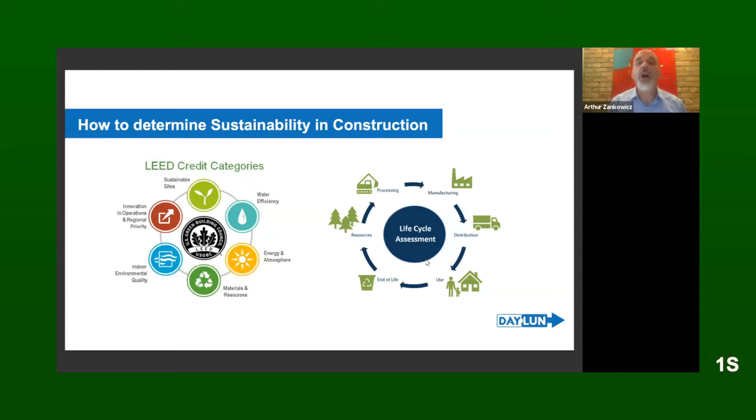One of the things my company likes to do, and it isn't really being talked about so much yet, is deconstruction. We have what's called infills, where houses built in the 50s and 40s are being redeveloped, and essentially you'd have an excavator come by and crush it. Well, it's important that we learn how to reuse and take some of the product in these houses and recycle or upcycle.

Right now, 23% of landfills come from construction waste. That's a pretty big number. A quarter of the garbage in your local landfill is from construction. So what can we do? We can deconstruct properly.

We can regulate citywide to say that out of a certain percentage of the house you knock down, a portion has to be used or reused. We can use product that is organic and biodegradable, meaning we can take it, put it in the ground, and it goes back into the earth. It has a life cycle that way. We can make product that you can reuse and reuse.

With my company DAYLUN, we have product that you can unscrew and screw back together, which is the ultimate in deconstruction, because you can take down a house and move it somewhere else. So it's never wasted. We have what's called here in Ontario, Habitat for Humanity.

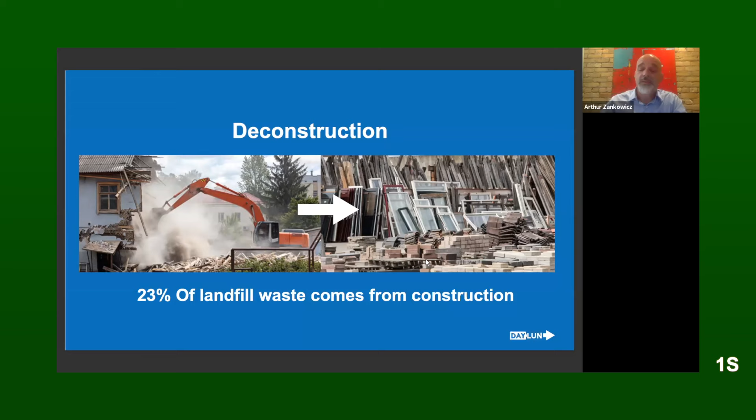Some design and construction is turning into fast fashion, where I need a new door or I want a new look. That needs to be addressed and somehow filled. With Habitat for Humanity, they take in all those windows and doors and cladding that they can put towards housing and affordable housing. So that's a big thing we need to address in the deconstruction of the way we rebuild our houses. The next thing, the most important aspect, is how we build.

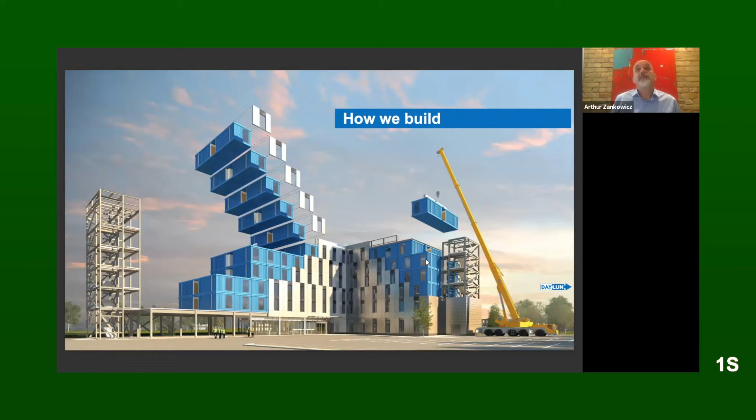The one thing about the construction business is that we've been building the same way for many, many years, and it's not efficient, it's not sustainable, and it's not cost effective. And with our housing crisis and prices going up, there has to be a better way.

The one way that we use, and it's the biggest trend, is modular build. Building off-site is turning into a big industry. It's going to be a $107 billion industry by 2026. We build cars in factories. There's no reason we can't build houses in factories.

It leads to precision, less waste if you predetermine the size of things, and you can have things pre-cut, so there's less waste, which is a great sustainable factor. A controlled environment here in Canada - when it's snowing or raining, guys just want to get home, right? And so things aren't done well. A lot of waste of materials, and things take longer.

In a factory, the factory that we designed, we can pump out a 2,000 square foot paneled house in about 10 minutes. A lot of people are shocked at that timing. But if you think cars come off the line every 30 seconds - and how complicated are cars? Cars are very complicated, right? So there's no reason why we can't be doing this.

And if we're doing this, the prices decrease and housing becomes affordable, right? So that is one big way the future of building is going to take place, and it's the modular offsite build.

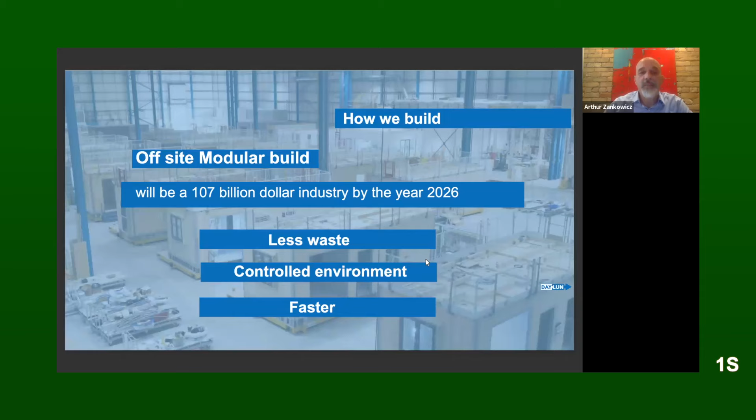The other thing that's come out in the market - it's still a new kind of process, it's expensive, but like anything in any technology, it's going to get cheaper and faster - is 3D printing. So 3D printing is essentially like your printer at home, and it has a design and it spits out a concrete compound, and it outlines the house and builds it in a 3D way, which looks like lines and layers. And this, I think, is going to be the future.

Right now in 3D desktop printing, there are filaments that are wood. So in my fashion days, we'd be designing shoes, and we'd be going through molds, trying to get the right shape, the right design, how it works together. Each mold would be like $2,000. So before we got a shoe to market, we'd spend $20,000, especially when doing a high-tech shoe, in developing and designing and making molds, and it would take so much time getting it the way we wanted. But now with 3D desktop printing, there's EVA molds.

It's the foam that's in your running shoe. There's TPU, there's different filaments that go into a 3D desktop printer that can reproduce the shoe probably almost 80% of what it is. So essentially we hit print, come back the next day, we have our shoe. So I think 3D printing is going to be a wave of the future.

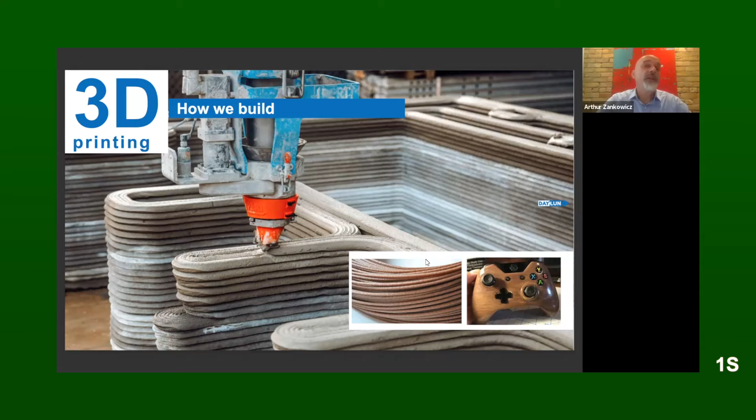And each printer head can have different material, whether it be for your kitchen, for your washroom, for your exterior, for your insulation. So I think 3D printing is something to look at and see how it grows in the next few years.

This is something that I also experiment with. Here you have Tupperware. You might think, well, what does Tupperware have to do with housing? Well, Tupperware is done with thermal molds. And thermal molds essentially is, you've got a sheet of plastic, it heats up, and out pops the shape of your Tupperware or whatever, and then you have the shape of your product.

So essentially, that makes your shape and what you want. So into the housing market, we can make molds of houses or walls according to what you need. Ideally, you have the shape of your house, you push it through a thermal mold, and then your building envelope becomes completely enclosed. Anybody who knows anything about passive houses knows the building envelope is the most important thing to your house. And if you can have one solid shape, then you've answered all the questions as far as a passive house. So I think thermal molding has a place in the future of housing, and I think it will drive innovation in the next few years.

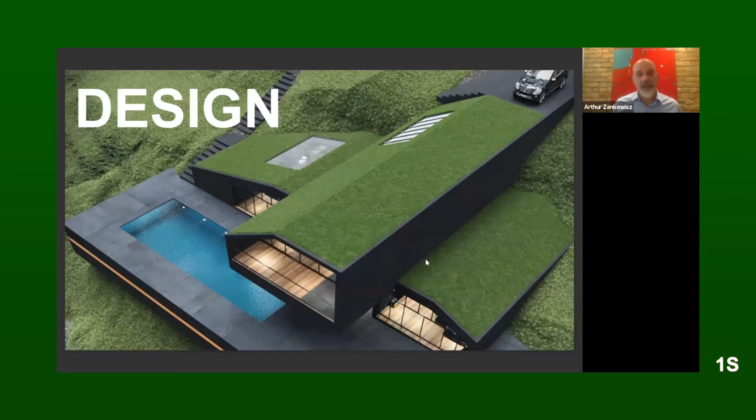The next thing I want to talk about is design of the house. We've talked about how to build, but now the design. We have to rethink the way we design a house. There's so much pressure put on architects to pump out a design, to get the permit approved. There's so much importance on engineering - the engineer wants to make sure it's structurally safe - but we almost have to reverse engineer things. We have to look at the design and what we want to achieve sustainably, and then think of how to work backwards so that it hits the structure, it hits the permits.

So one thing about design is making it green. We now have subsidies to put a green roof on our houses. The way we position the house is very important. So neighborhoods are going to look different in the future. We can no longer put up neighborhoods and have a cul-de-sac here and just arbitrarily place houses.

There's going to be a fight for energy, and the energy is going to be the sun. So if we're building or designing a neighborhood, it's got to be done in a certain way where we position the houses so they don't impede each other with shading. They're done in a rectangle where the majority of the house is facing south, so all the sun and solar power hits the house, because this is what's going to be our energy in the future as we move more to solar communities and solar power.

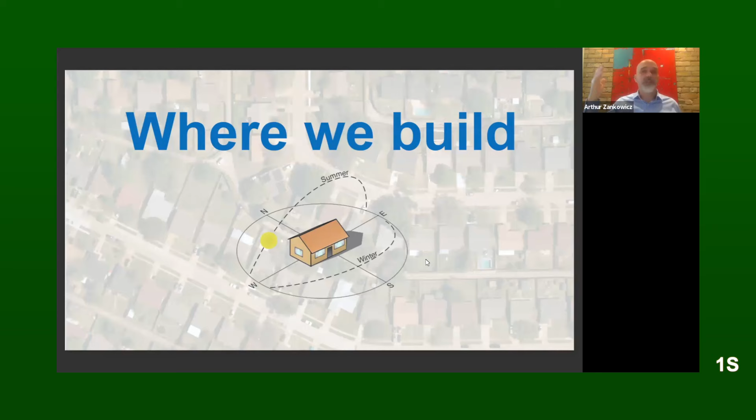The next most important aspect is the materials that go into the house, key for sustainability, along with the construction methods. To give an example, bamboo is a wonderful source that is replenishable. A mature bamboo plant reaches full maturity in 6 years, compared to pine or maple, which takes 60 to 80 years. So you can chop them down and grow them again. It's strong, and it's lighter than some other woods.

Here in North America, we have hemp, which is making a big impact. There's hempcrete now, a mixture of hemp and a glue mix that we can make concrete blocks out of. It's biodegradable, strong, sustainable, and very easy to replenish. So you have to look at local forestry, organics, and biodegradables.

One thing that I developed with our company is an EVA wall. Drywall is one of the biggest pollutants in landfills, and I just find drywall nasty—sanding it, breaking it down. My EVA is basically the foam we put in running shoes, which is stronger than drywall.

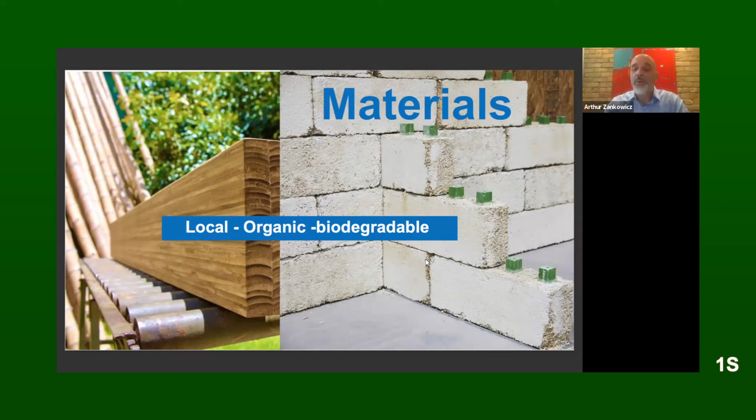Materials are key for the future—what we use locally. Another great thing is rammed earth. Essentially, you can take the earth around your house, pound it in with a mixture, and you have your concrete foundation. We have a vegetable glue, completely 100% organic, that you can mix into any kind of ground earth. It's got to be a certain size—pound it in, and our MPA or PSI strength is equal to concrete.

So by just taking the earth around you, you can start making your foundation, and if you look at this picture, it looks beautiful. That's one way of taking your surroundings and what's around you and implementing it into your design. No matter where you are, there are certain minerals and raw materials you can use and figure out ways to put into your design based on what's plentiful in your neighborhood. These are important things to consider when building your house and trying to be sustainable.

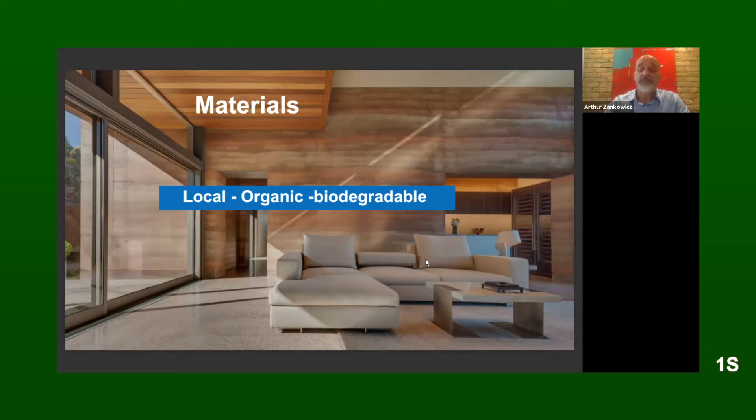The one big issue with moving forward, trying to get all these great ideas, being sustainable and thinking of the future, is the challenges. One of the biggest challenges in the construction business is adaptation—the adoption curve—meaning if there's a new invention, it takes forever to come to fruition on the job site.

There are many reasons. One is that there aren't more modular building factories because every city in North America has different codes and regulations. Think about a car—besides California with their catalytic converters and some different regulations, cars are built pretty much standard. Houses aren't. Every city has a different code, and it's very difficult to build something massively and hit every market. So this is what's impeding us, the regulation. Cities also demand one thing but have regulations stopping you from doing another.

So I was explaining that here in the city of Toronto, for every tree you cut down, there's a fine. When I asked the forestry department why, they said, 'Arthur, because of carbon footprint.' I said, we shut off all gas going to our houses—there's no gas. Do you know what that equals as far as mature trees? They had no idea, but shutting off gas to your house equals 2,000 mature trees in your backyard. So there's a disconnect between what regulation is asking for and what we can achieve.

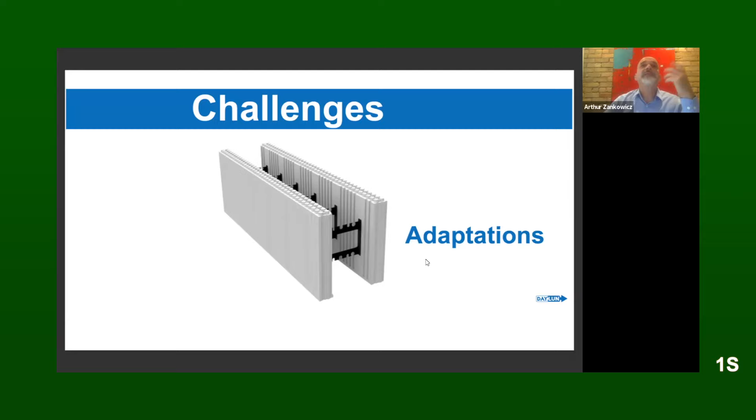The one thing that I always preach in my company is that let's come up with 2.0. You never hear engineers or architects who think of new designs, or something they see, or a cladding that they like, or a color, the new trend, but never a new version. And I think in housing, we've got to think like the iPhone - the iPhone 11 comes out one year, then the iPhone 12, and everybody jumps and buys the upgrades because they want to have the latest. Why wouldn't you spend that on the most expensive thing that you're going to buy in your lifetime?

And with our houses, we've come up with a lot of concepts. In the front of our house, we have this big architectural piece that looks just like an architectural wall, but really, I call it the brain. And inside the brain, it goes from our basement to the roof. It's kind of a new take on a mechanical room. So all our batteries are in there. All our wiring is in there. All our water lines come in from there.

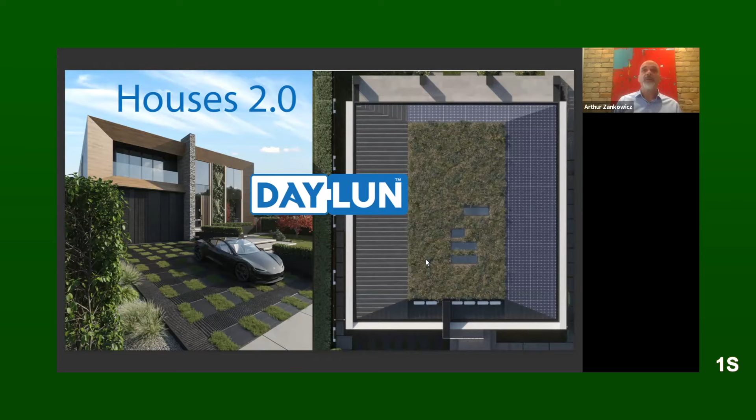It's crazy. So all my plumbing on my walls - if I have a nice, beautiful porcelain wall in my washroom, behind there the wall pops up so you can easily reach in and fix anything you want. The ceiling tile, everything pops out, so if you want to get in there, replace it, look, it's no problem. But this is the way we need to think. This is why I'm always looking for new innovations, new investments, and new products, always looking to upgrade my homes from one version to the next. This is the way I think housing can be sustainable, faster, and more effective going into the future.

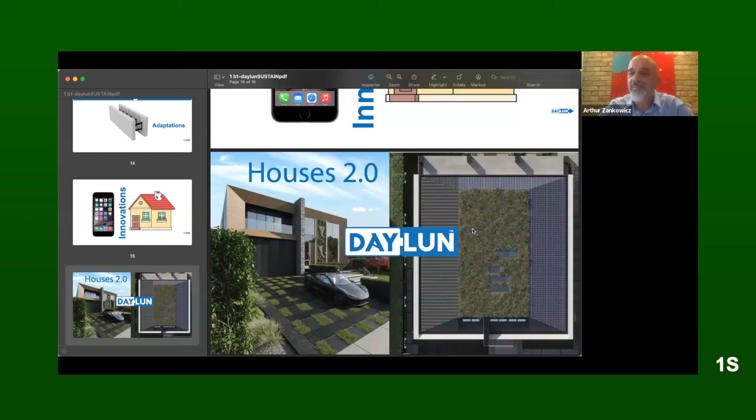Very nice, Arthur, very nice. Boy, talk about the future is now. Wow, what's some great stuff there - great images, great discussion. You can certainly say, I mean, with your background in film sets and fashion, you can certainly see where you cut your teeth on this as you moved into it.

So really talk about adapting all your skills. Outstanding, the modular build is an interesting idea, doing it offsite in a controlled environment. You talked about weather and those types of situations, and how precise it is. Obviously you can get all the certifications done and cut down on waste. How flexible would you be with the modular piece there?

Could it be individuals' designs coming in? Yeah, we work more in 8 to 12 foot sections, so it's really easy to make things customizable. If I have a 12-foot piece and you want 13 feet, it's just that 1 foot that we customize. The exterior comes with cladding clips, so it's simple to add aluminum paneling, brick, or whatever you want. If you look at the skeleton and the shell, it's really simple. The exterior you can make modern, square is modern so it's easier, or you can make it look ornate with copper roofs, whatever you want. It's essentially about accessorizing.